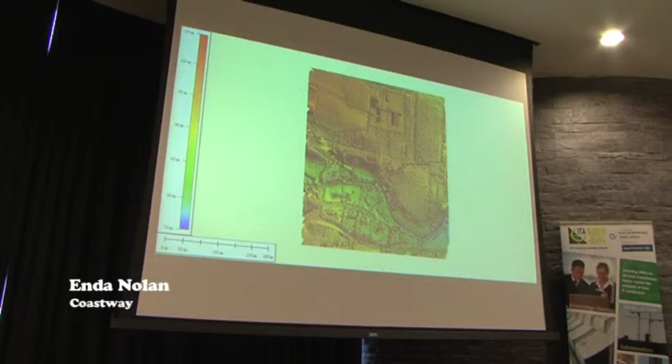Some of the other guys on the team will be running a SUDS program to see basically flooding. There is actually, as you'll see, the river in the area.

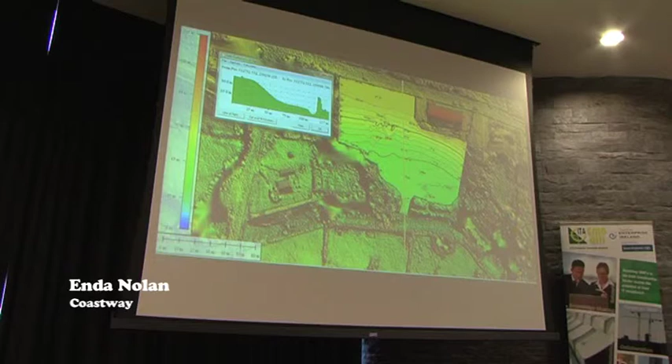If you look at the top left hand corner, you'll see a cross section of the actual site, and you'll see it's about 137 metres wide. You'll see the river there, and you'll see the wall, if you can see it in the top left hand corner.

Cross sections anywhere along the site - our software allows us to do that anywhere you want. You'll see the building in the top right hand corner.

The survey work took, I would say, about 4 hours for the UAV flight. The building itself, we actually laser scanned. We georeferenced that to Irish National Grid as well.

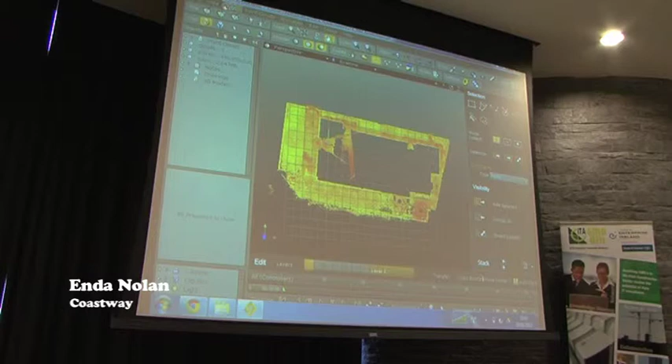Niall is going to use a software now - if I'm allowed to mention it, I think it's Point Tools - to actually show you. And for planning, we can actually take a walk through the building if need be.

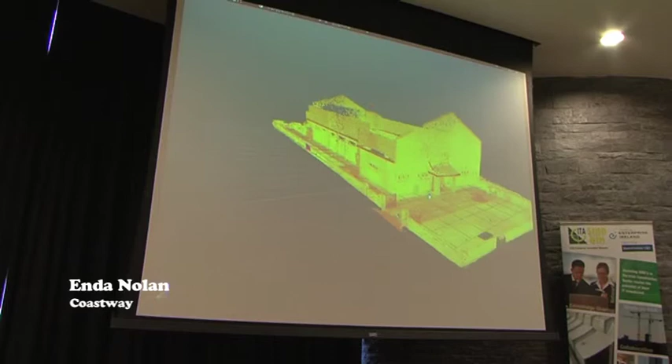Billions and billions of survey points. We'll hand it over now to whoever wants to take on the modelling, in whichever survey program you want to use. But that's the building.

Obviously if you leave it for a second you'll get higher pixelation. But yes, all members can now view that online. You don't have to go back out to site, you can work from there. You can model - there's lots of software, and some of the sponsors actually provide software we can work from.

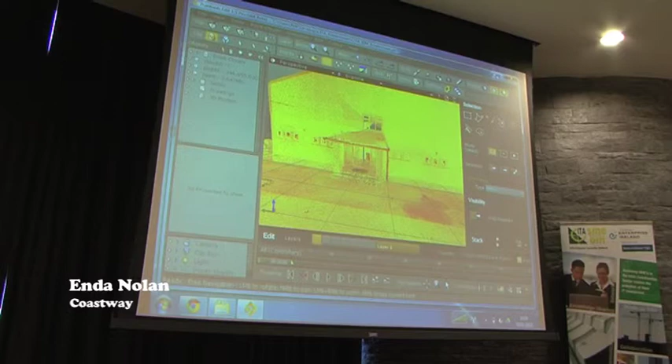I'll just give you a look around. That is a point cloud of the building - we've gone inside and out. This is using a cloud-based solution provided by Team Platform, and how it works is we can take the full coloured point cloud and give that to every team member.

As a support team, our focus was on providing data for everyone along that design process. So looking at the macro view of the site, having the ability to create a DEM, we can take that topographical information and put it into different BIM software. So starting from a macro level, working your way down to the micro level where you're scanning each individual component, you're able to make as-built components for the different BIM packages as well.

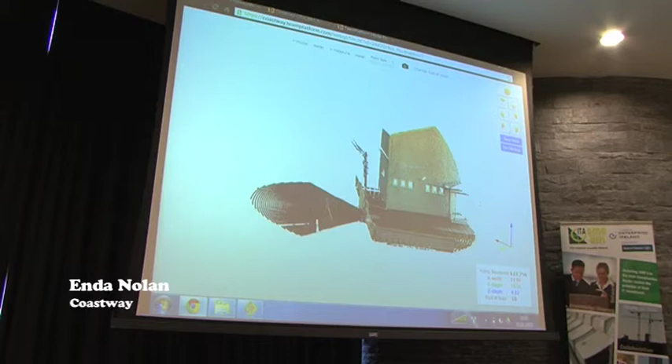It's a good way to really analyze what assets you actually had on site, and then be able to use collaboration tools like this. Any team member can come in and annotate and take dimensions from the laser scan data. It works much like Dropbox, only for geospatial information, so anyone can log in at any time and access this information.

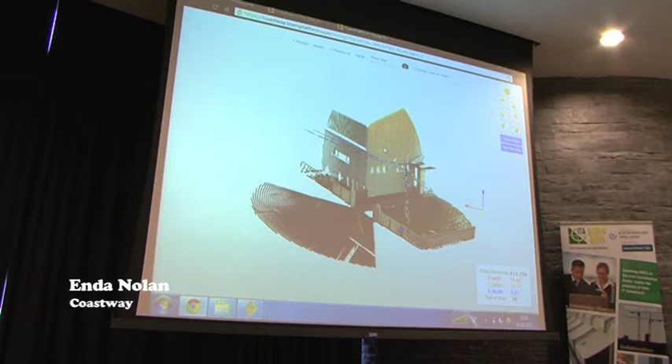And what we also did, on Photosynth for Microsoft, we put all of the UAV photographs up there. Using Silverlight you can go in at any stage and look at the entire context of the building. What's good is, with all traditional surveys you're just given CAD drawings, but we're trying to look at the I in BIM and look at information at a broader level.

Where some people might - a contractor said, well, what was the roof condition? I'm going to deconstruct this building after the design is complete - what is it like up there? And to improve safety, it's a great idea having this elevated view of the entire site so you can really look at what's going on.

So they're available online all the time - you can look at this even with a tablet, to all of the different designers and professionals. This data can be given to various teams, it's on the Team Platform now, and so whether they have Bentley, Autodesk, Tekla, Vico, or whatever it is, they can take it and manipulate it.

That's right, great, well that's kind of it. Just something Deborah did mention earlier on - people walking around inside a building, okay, design of a BIM 3D model - just speaking up for surveyors here, if you're walking around with your iPad going behind that wall, there is an array of ducts, cables and so on.

Be wary, I would say, of working off the design, because unless it's surveyed and geo-referenced on site - having worked on many buildings myself, measure twice, cut once, I think is the key, because you might see, yes it's there, but it may not be there. So surveying as-built is still, shall we say, very relevant. Thank you for that.